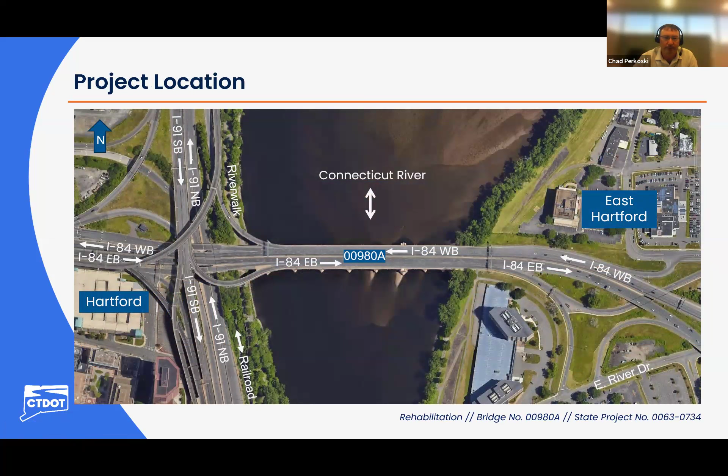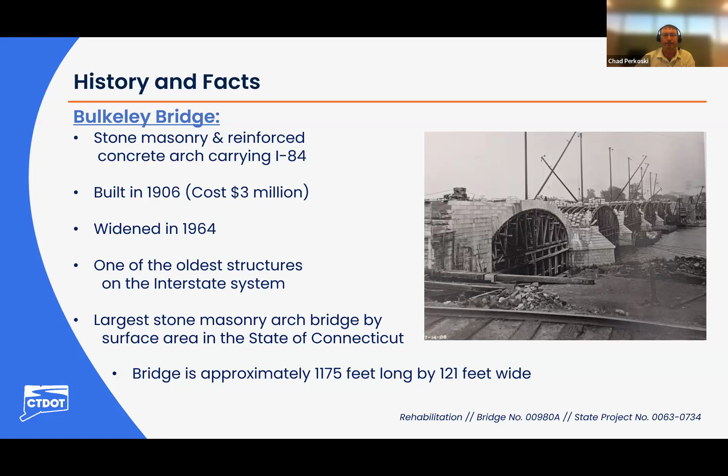The Bulkeley Bridge is a very rich historic structure, one of the, if not most, well-received historic structures in the state. It is a stone masonry bridge that was originally built in 1906 at a cost of approximately $3 million at the time, an extremely high construction cost for a public project. In 1964, it was widened to the north, utilizing reinforced concrete, and is one of the oldest structures in the interstate system, and one of the largest stone masonry arch bridges per surface area in the state of Connecticut. The bridge is approximately 1,175 feet long and approximately 121 feet wide. Next slide, please.

At this time, I'd like to turn it over to my teammate, Nathan Loganathan. He'll explain the existing conditions of the structure as it exists today. Thank you, Chad. Good evening, everyone.

Before getting into the existing conditions of the Bulkeley Bridge, I thought it would be useful to explain how condition ratings are determined and their purpose. The Bridge Inspection Manual states the condition rating is a judgment of a bridge component in its current condition compared to its original as-built condition, providing an overall understanding of the general condition of the component being rated. Condition ratings are assigned a numerical value, each indicating a different condition: 8 is very good, 7 is good, 6 is satisfactory, 5 is fair, 4 is poor, 3 is serious, 2 is critical, 1 is imminent failure.

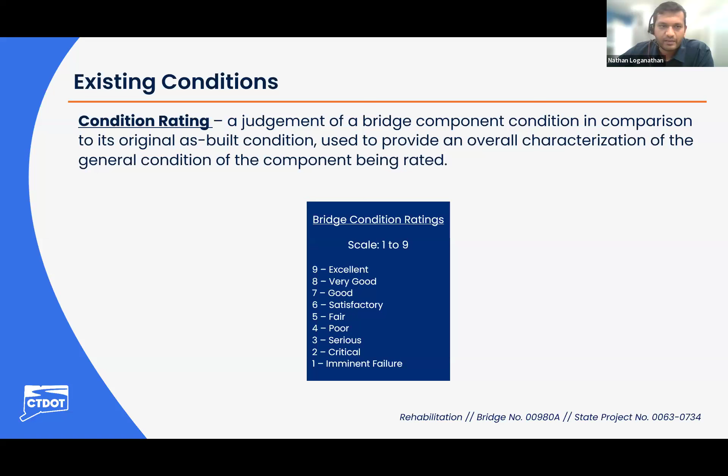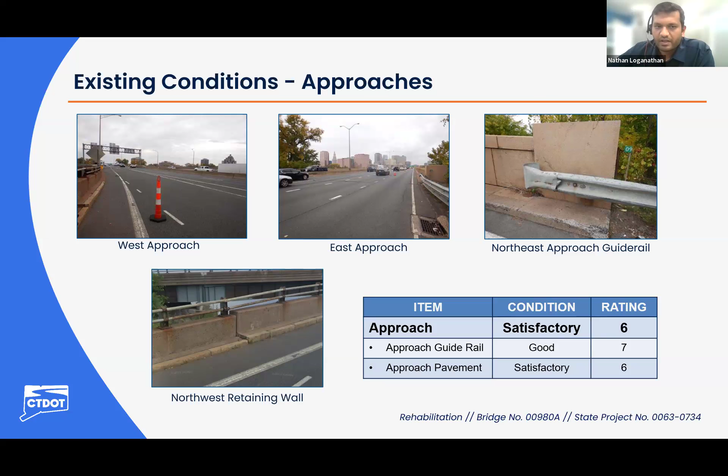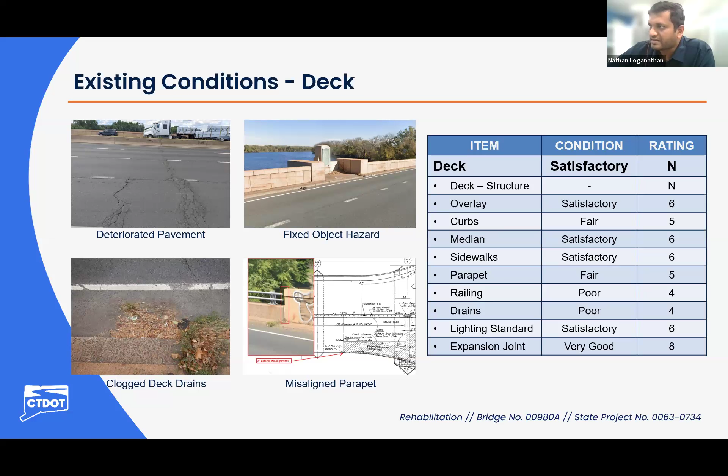The image on the top left is a general condition of the wearing surface. The fixed object hazard, which I discussed earlier, is on the top right side. The clogged deck drains are on the bottom left side. The misaligned parapet is on the bottom right side. Next slide, please.

Existing condition of the superstructure: overall, the superstructure is in satisfactory condition. The image here shows one of the piers which has extensive efflorescence due to water infiltration from the roadway level through the fill and through the stone masonry. Next slide, please.

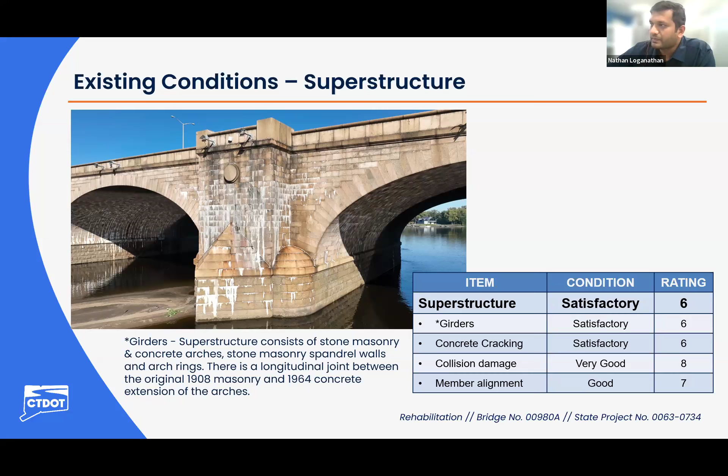These are close-up images of the cracks in the stone masonry arch, which exist throughout the entire longitudinal length of the arch. These are full-length cracks due to thermal movement, and there are no structural concerns due to these cracks. The image on the right side is the cracks on the spandrel walls. Next slide, please.

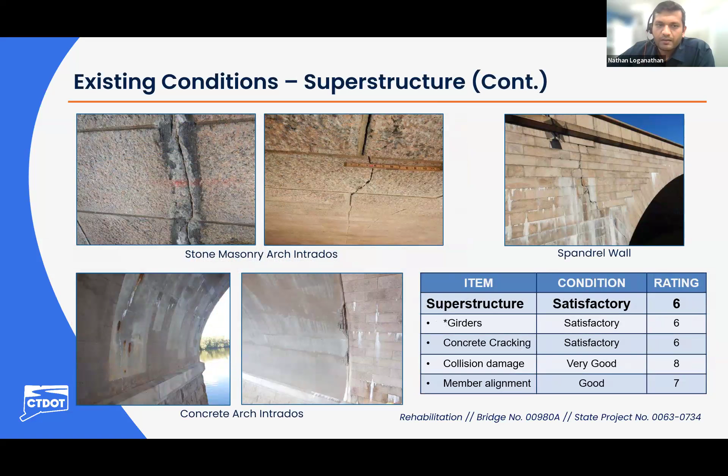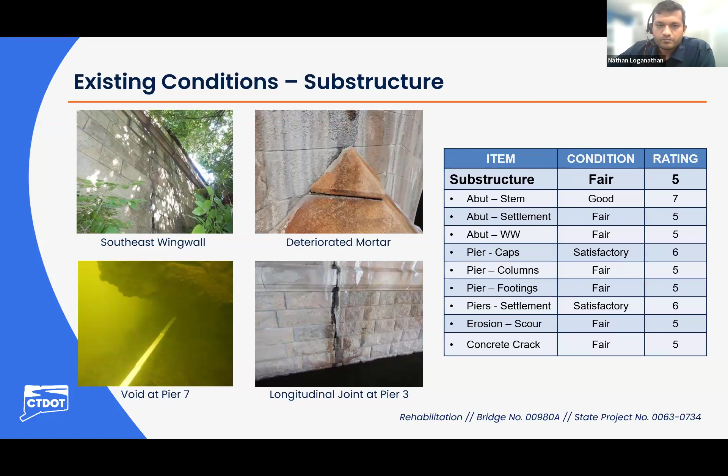Overall, the channel and channel protection is in fair condition. Scour critical rating is noted to be a 5 per the most recent inspection report, which implies scour is determined to be within the limits of the footing. The image shown here on the west side is Pier 2, which has the most scour. The riprap are rated a 5 and are noted to be in place along the pier footings.

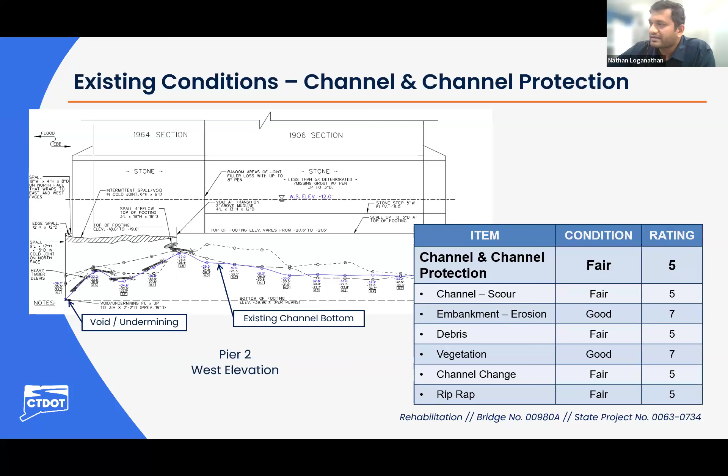As earlier discussed, the condition of the structure has shown some age, being over 100 years old. However, the deterioration currently exhibited is fairly minor, and the purpose and need of this project is to bring the bridge back to a state of good repair. That means the bridge needs to address a handful of things to provide improved traffic safety, to get in front of some of the deterioration currently being exhibited, and to clean and maintain the structure.

As part of this project, the team will be addressing the substandard parapets on the north side on I-84 westbound, as well as the median, replacing the cracked, deteriorated wearing surface and asphalt pavement, cleaning the bridge scuppers, which remove surface water from the roadway, and replacing the roadway luminaires with new modern energy-efficient LED fixtures. We'll repair the underlying concrete pavement under the asphalt, repair the substructure deterioration as noted earlier, including below-water voids and spalls to the substructure, seal and repair cracks, clean the efflorescence, remove any graffiti present, reconstruct a portion of the upper northwest retaining wall that has settled, and at the completion of the project, seal all concrete from any de-icing salts penetrating.

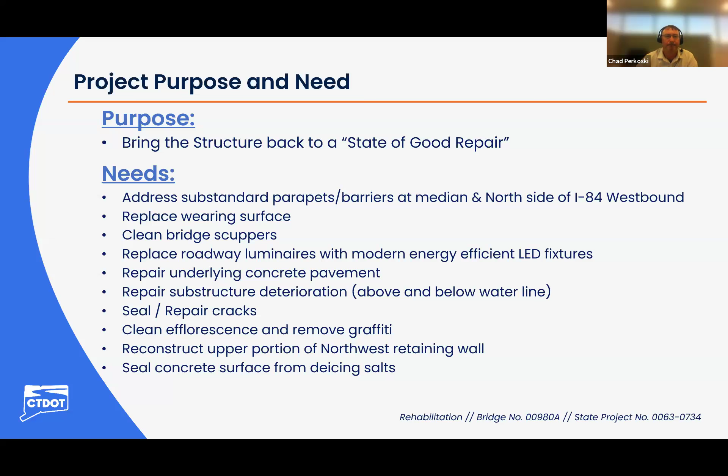Here's a plan view showing the western portion of the structure. The purpose of this plan is to show the limits of the project. The light gray will be the limits of the pavement reconstruction. In the upper left corner is a small portion where the upper parapet has settled, and that will be reconstructed to provide a uniform surface, preventing any snags from vehicles that may impact it. In the middle portion of the structure is the median, which will be replaced with a new current standard single slope concrete barrier. Along the upper portion of the structure, a new concrete slope barrier will similarly be installed in front of the existing stone masonry barrier.

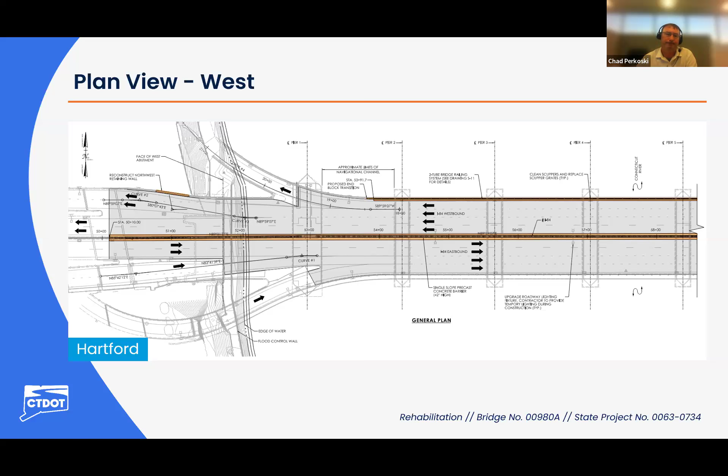This is a plan view of the eastern portion of the structure. I won't reiterate exactly what I just said, but similarly, in the middle is the median work. The light gray is the pavement reconstruction and concrete repairs that exist underneath the pavement. The northern, upper portion of the bridge is the barrier reconstruction.

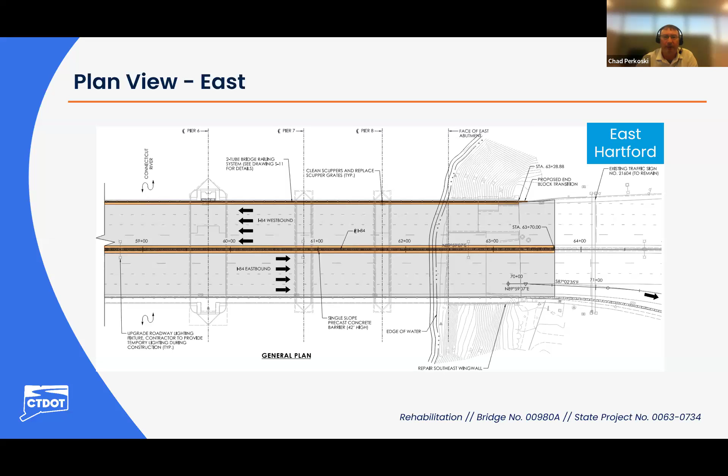This is a cross section of the existing structure showing the proposed work. In this slide, you'll see two colored portions - those are the barriers and medians to be replaced. In the middle is the median barrier in a beige tone, which is the single slope barrier referred to earlier. On the left side of the screen is the northern new single slope barrier that will be installed in front of the existing stone masonry barrier. That'll close off the traffic safety hazard and provide a MASH compliant system.

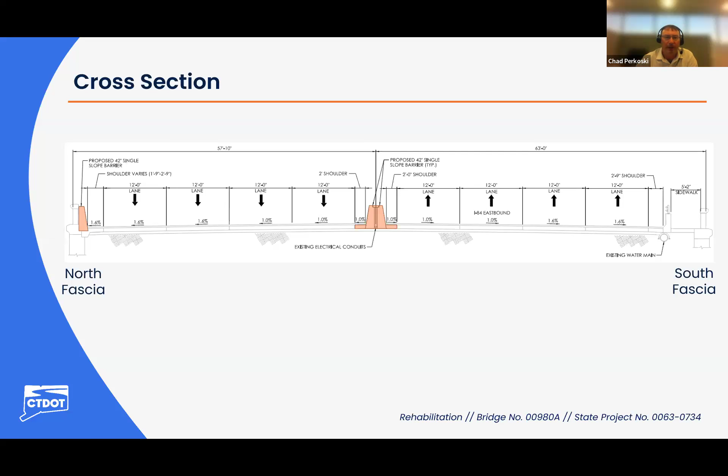This project is nearing semifinal design. To this point, the project team has coordinated with regulatory agencies and the towns as we work towards finalizing the design, ensuring that the project minimizes impacts to natural resources in the area. The environmental resources here in particular include the Connecticut River as a tidal river system. We've coordinated with NDDB area mapping, showing any special or endangered species, such as the northern long-eared bat and monarch butterfly, to name a few.

We've identified the area as not in an aquifer protection area. In terms of impacts, we do not anticipate any temporary or permanent wetland impacts in this area as part of this project. We will continue to analyze this as we refine the design; however, at this time, there does not appear to be any impacts to the wetland.

In terms of anticipated permits, we will be pursuing a Connecticut Department of Transportation Flood Management Certification General, a U.S. Coast Guard construction letter, a U.S. Army Corps of Engineers Section 404 pre-construction notification, a U.S. Army Corps of Engineers Section 408 as it relates to the levee system that abuts the eastern and western sides of the structure, the Connecticut DEEP Certificate of Permission, and the Connecticut DEEP Boating Marker Permit. Coordination with Connecticut DEEP Fisheries is ongoing, as well as with the Office of Environmental Planning, to ensure we coordinate with the National Marine Fisheries Service and the NOAA essential fish habitat requirements, to ensure we minimize any impacts to the surrounding area.

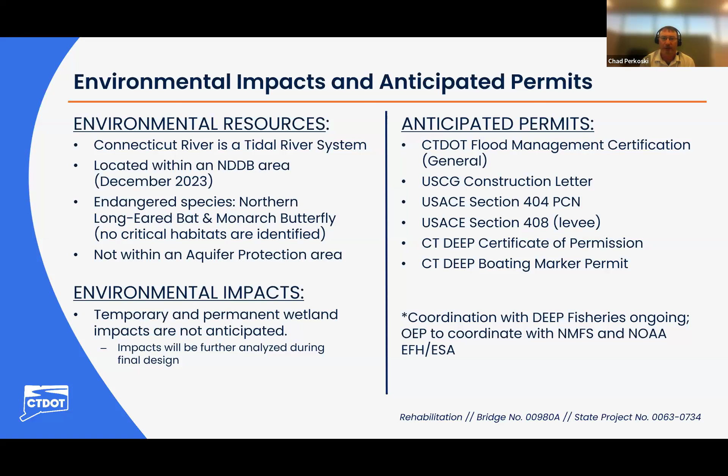Rights of way and utilities. There are anticipated construction easements required to perform the anticipated construction activities to access the Connecticut River.

As noted, there will be some minimal work to the substructures at or below the water line. Most of that work will be performed via a work barge in the river with underwater divers using specialty equipment to perform said work. There will be some work above the water line, below the substructure.

This work will address the cracking and clean the efflorescence, the white chalky material visible in the previous slides.

In the southeast corner, the lower right corner in the previous slides, there was a section of the wing wall where stones have been either dislodged, broken, or settled, which will be addressed by accessing from the town of East Hartford side and reconstructing an upper portion of that wall to bring it back to a state of good repair. In terms of utilities, as noted, the median will be reconstructed with a new concrete slope barrier, single slope barrier, with new LED lights.

The LED lights will obviously impact the current ones temporarily, with a new standard installed at the completion of the project. There are no other electrical or utility impacts associated with this project.

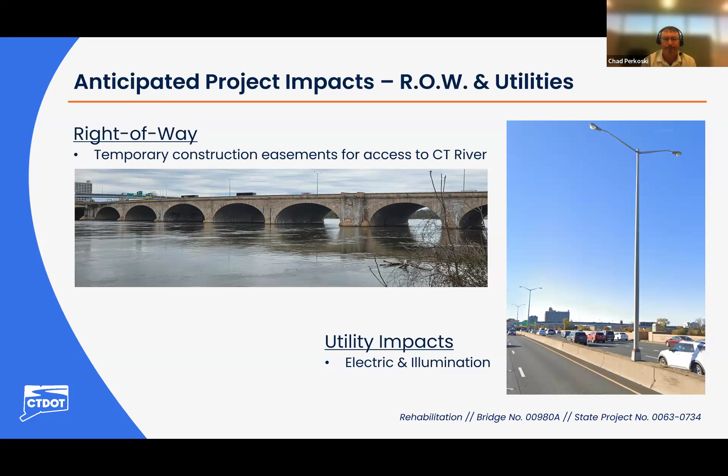Anticipated project impacts associated with traffic. This corridor is a very highly utilized bridge. It's a primary access point to enter and exit the city of Hartford.

CHA is working with the Department of Transportation to perform a regional traffic management plan to better understand and reduce the traffic impacts as much as possible. That does not include just this project. It will involve looking at all the projects in the surrounding area when construction is anticipated to begin, evaluating traffic movements, lane impacts, and pedestrian impacts. That will all sync up to minimize impacts and maintain safety as much as possible.

This project can be best described as a series of smaller projects. I'll start with the median reconstruction phase. The anticipated traffic impacts associated with the median reconstruction will involve short-term shoulder and adjacent lane closures.

The work will likely begin from the west and work its way towards the east. The duration is approximately 6 months for this type of activity.

The next major construction phase will involve the installation of the north barrier, the single slope concrete north barrier. Due to the construction activities associated with this, a long-term closure involving temporary concrete barrier curbs at the north shoulder and adjacent lane is likely required. The duration of this activity is expected to be approximately 9 months.

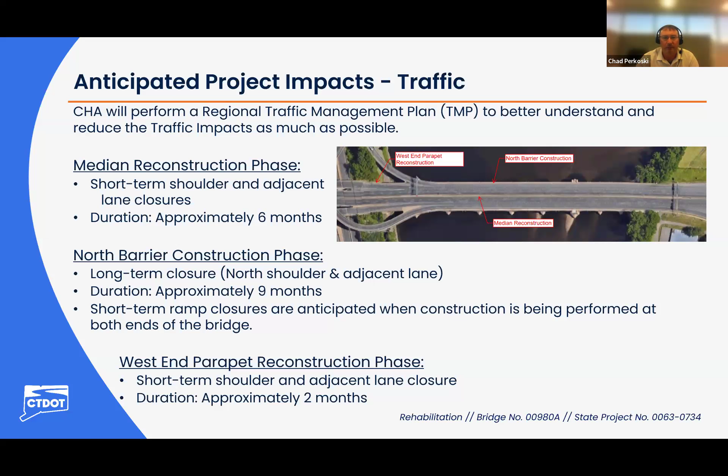All of these activities will be performed singularly, not at the same time, to reduce the impacts to the adjacent area while the project is being performed. Next slide, please.

The project also includes removing and replacing the existing wearing surface and patching the concrete pavement that exists below it. This activity will likely be performed during the nighttime and will involve daily short-term lane closures and drums. It'll be off-peak hours and will last approximately 4 to 6 months in duration.

I do want to point out the arch and other pier repairs. Those activities will be performed below the roadway surface and are not anticipated to impact traffic for any extended period of time. Next slide, please.

So we talked about traffic for vehicles, and now we'll talk about pedestrians and bicycles. There is no on-road bicycle planning network in this area. There is a sidewalk on the south side where pedestrians currently have access to the bridge from the town of East Hartford to the city of Hartford.

Being a bridge preservation project, there are no significant changes to the geometry of the structure, and therefore no significant improvements are recommended for pedestrians or bicyclists at this time.

The Hartford Riverwalk is a constructed statewide multi-use trail which runs beneath the bridge on the western side in the city of Hartford. That is not anticipated to be closed by any means. There may be a small portion closed for a short duration for pedestrians; however, through traffic of pedestrians will be maintained.

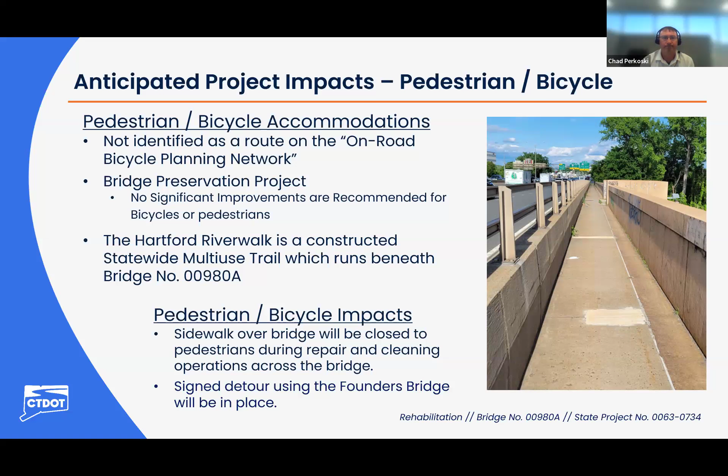That work will be required for short periods of time while the bridge is being repaired and cleaned, and there'll be signage throughout to ensure pedestrian traffic safety with advance notice. Next slide, please.

As noted with some of the construction activities related to the western side of the bridge, in this particular case the southwestern side, there will be a closed ramp to ensure both traffic safety and safe construction activities. That will require closing the exit 30 ramp, which will require a detour.

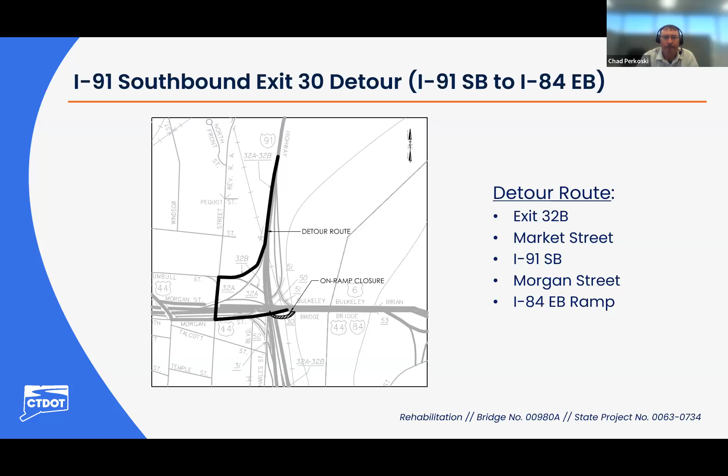The detour route is shown here, utilizing exit 32B to Market Street, I-91 southbound, back to Morgan Street, and accessing I-84 eastbound on the ramp in the city of Hartford. Next slide, please.

Similarly, the I-84 westbound exit 51 detour, which is essentially I-84 westbound to I-91 northbound, will require closures when the northwestern portion of the bridge is being constructed, for a short period of time.

The detour route is shown here tonight, which will involve taking exit 50 to Market Street, Talcott Street, down to Columbus Boulevard, onto Grove Street, and accessing I-91 northbound via the ramp.

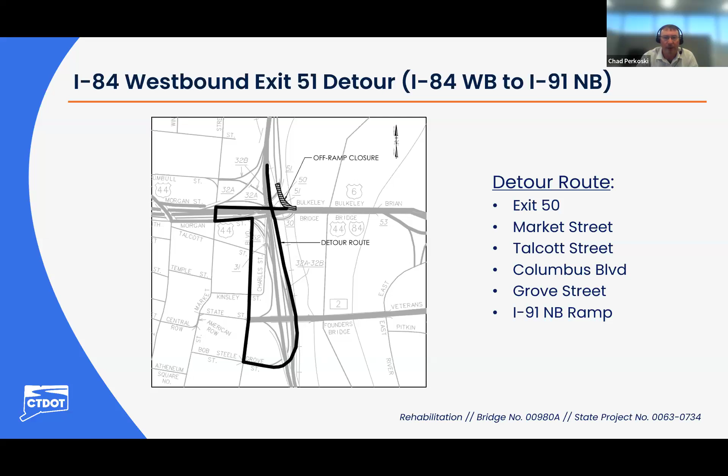During the northeastern portion of the project, I think the exit 51 detour will be implemented, which will require an on-ramp closure. The detour route is shown here in yellow. The route will take Connecticut Boulevard to Village Street to Governor Street, back onto the I-84 westbound ramp.

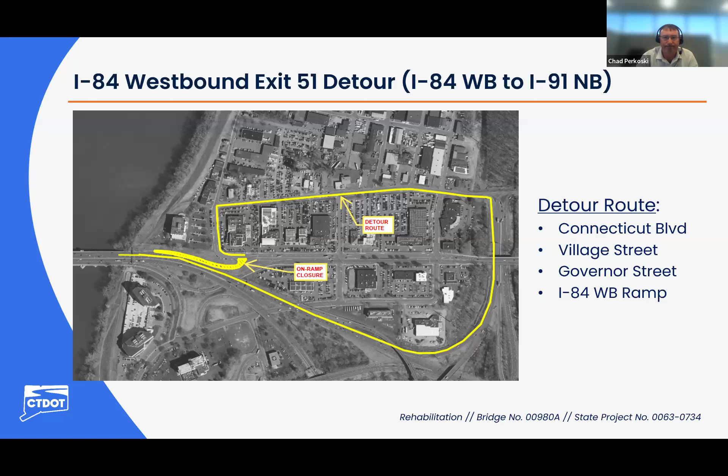While the construction is taking place on the southern portion of the bridge, pedestrians will be rerouted to the Founders Bridge, the next adjacent crossing south of the Bulkeley Bridge. The detour route will follow the Riverwalk trails along the Connecticut River and access the Founders Bridge as shown here.

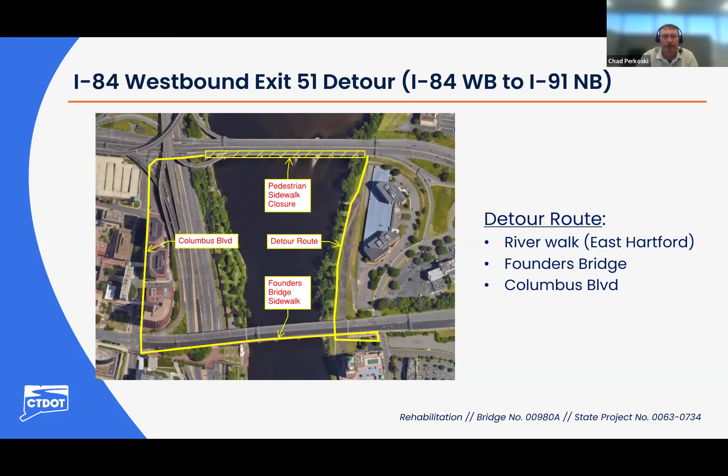Next slide, please. At this time, I'd like to turn it over to Tracey Brais, the project manager with the Department of Transportation, to discuss the project schedule and construction cost.

Thank you, Chad. Based on the current design schedule, we're anticipating that advertising for construction will occur in fall 2025, and the start of construction will occur in spring 2027. This is preliminary and subject to change, contingent on getting all the permit approvals and temporary easements that we need to do the construction. The preliminary anticipated construction duration is 3 years long.

We're currently at the 30% design level, and at this time the estimated construction cost is $23.9 million. To pay for this, we're looking to use 90% federal funds and 10% state funds, and no town funds will be required.

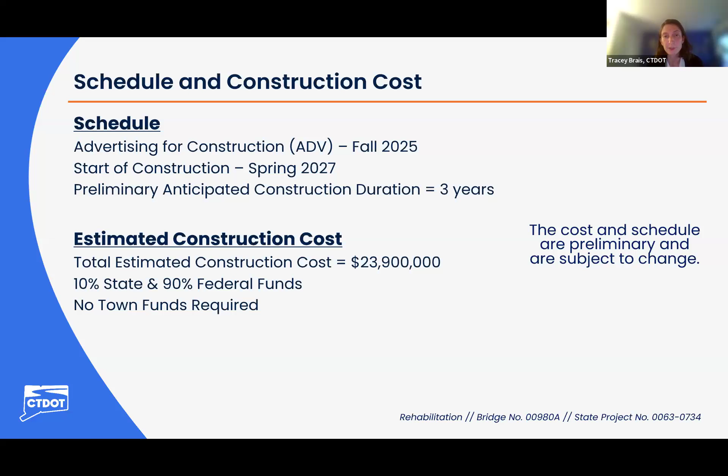Thank you very much for your time tonight, for taking the time to listen to our presentation, and hopefully you found it informative. At this point, we'd like to open it up to questions and comments.

We'll have this comment period open through June 17th. You're welcome to still email us with any questions or comments, or you can give us a call and leave a voicemail, and we'll get back to you.